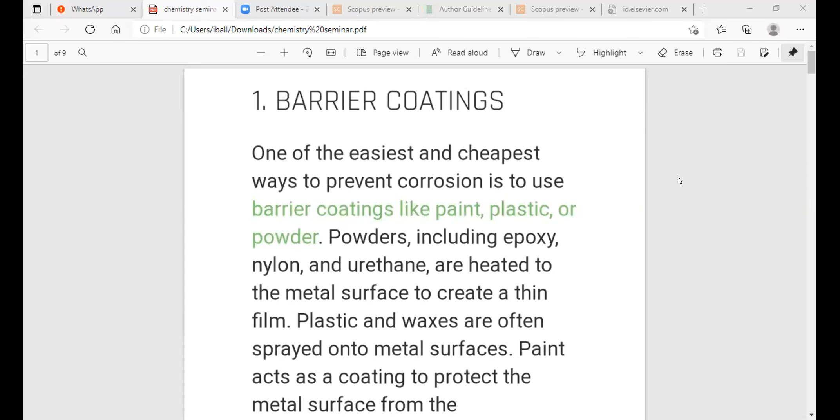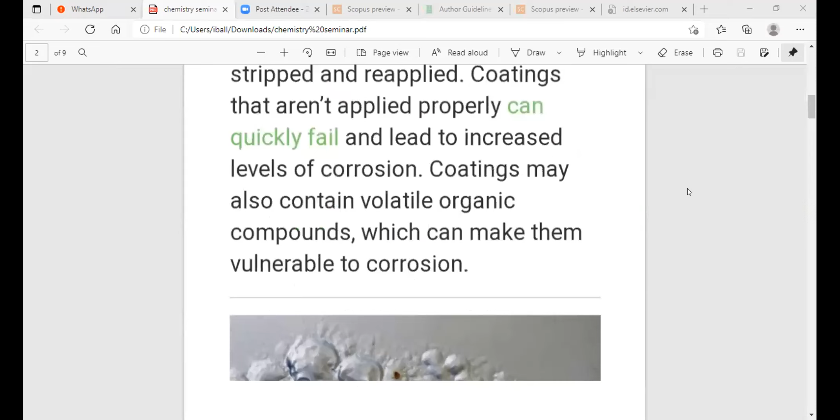paint, plastic, or powder. Powders including epoxy, nylon, and urethane are heated to the metal surface to create a thin film. Plastic and waxes are often sprayed onto metal surfaces. Paint acts as a coating to protect the metal surfaces from the electrochemical charge that comes from corrosive compounds.

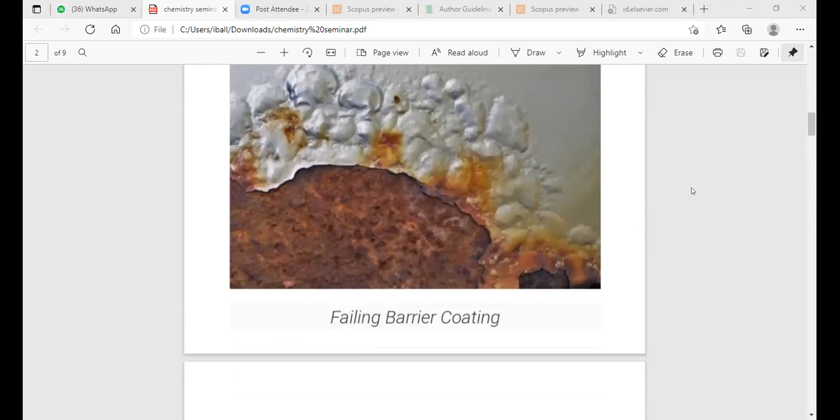Today's paint systems are actually a combination of different paint layers that serve different functions. The primer coat acts as an inhibitor, the intermediate coat adds to the paint's overall thickness, and the finish coat provides resistance to environmental factors.

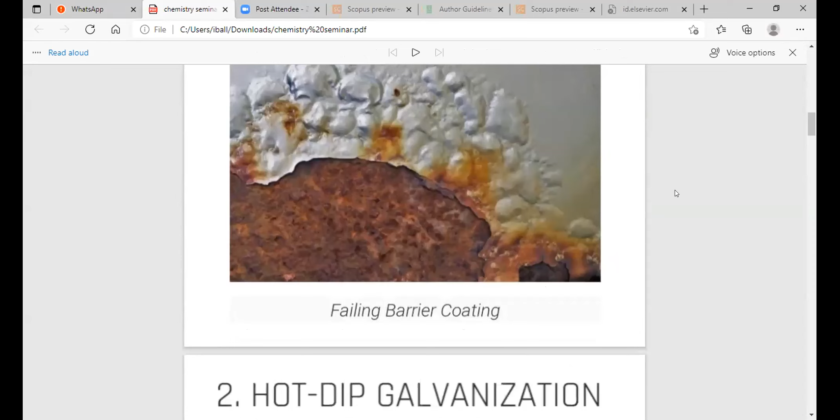Next, let us see the drawbacks of barrier coating. The biggest drawback with the coatings is that they often need to be stripped and reapplied. Coatings that aren't applied properly can quickly fail and lead to increased levels of corrosion. Coatings may also contain volatile organic compounds which can make them vulnerable to corrosion. This is an example picture of failing of barrier coating.

Now let's go through the second method, hot dip galvanization. This corrosion prevention method involves dipping steel into molten zinc. The iron in the steel reacts with the zinc to create a tightly bonded alloy coating which serves as protection. The process has been around for more than 250 years and has been used for corrosion protection of things like artistic sculptures and playground equipment.

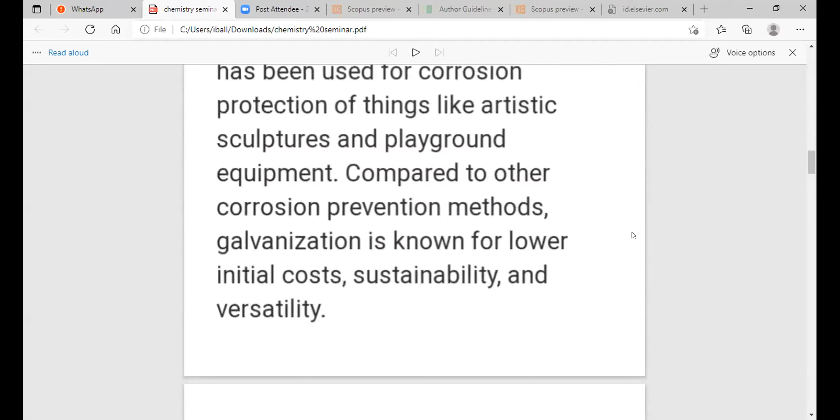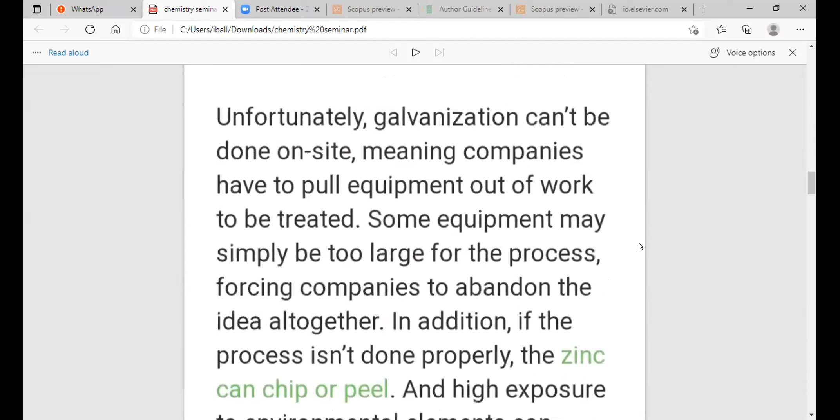Compared to other corrosion prevention methods, galvanization is known for lower initial cost, sustainability, and versatility. Next. Unfortunately, galvanization cannot be done on site, meaning companies have to pull equipment out of work to be treated. Some equipment may simply be too large for the process, forcing companies to abandon the idea altogether.

In addition, if the process isn't done properly, the zinc can chip or peel, and high exposure to environmental elements can speed up the process of zinc wear, leading to increased maintenance checkups. Lastly, the zinc fumes that release from the galvanizing process are toxic.

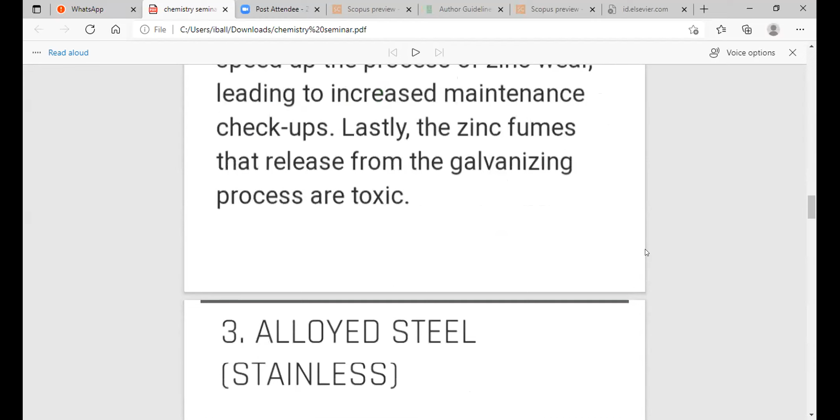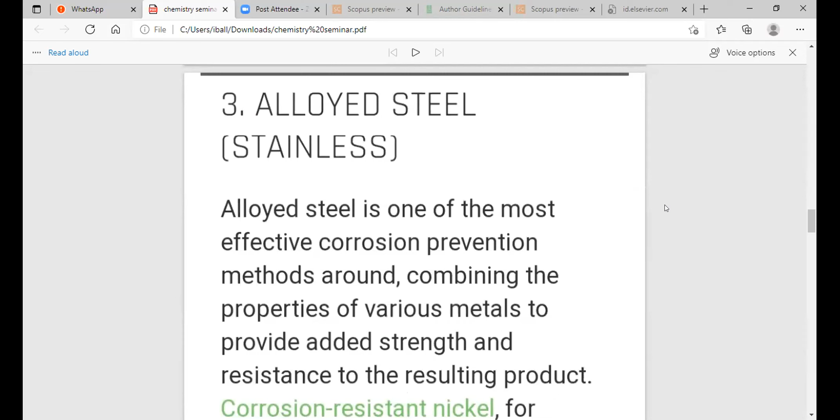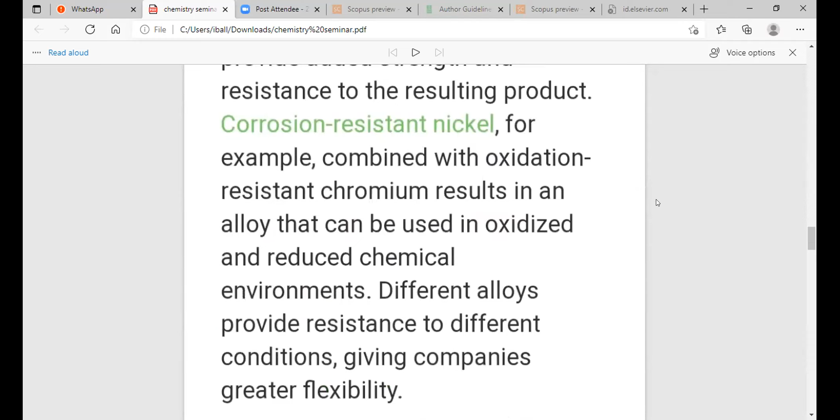Next, go to the third method, alloyed steel. Stainless and alloyed steel is one of the most effective corrosion prevention methods around, combining the properties of various metals to provide added strength and resistance to the resulting product. Corrosion resistant nickel, for example, combined with oxidation resistant chromium results in an alloy that can be used in oxidizing and reducing chemical environments. Different alloys provide resistance to different conditions, giving companies great flexibility.

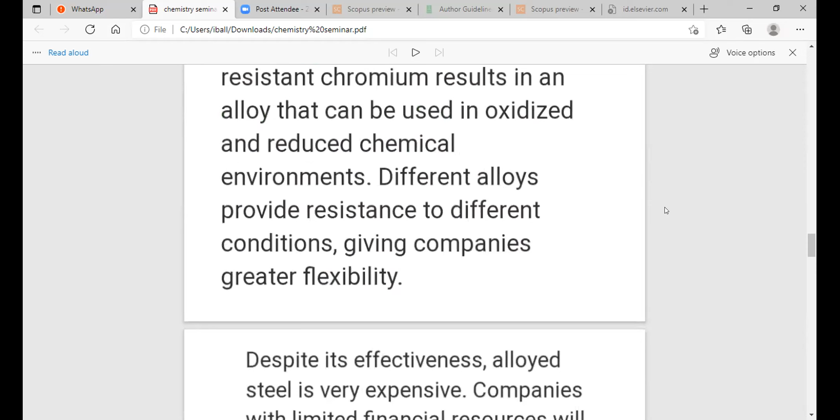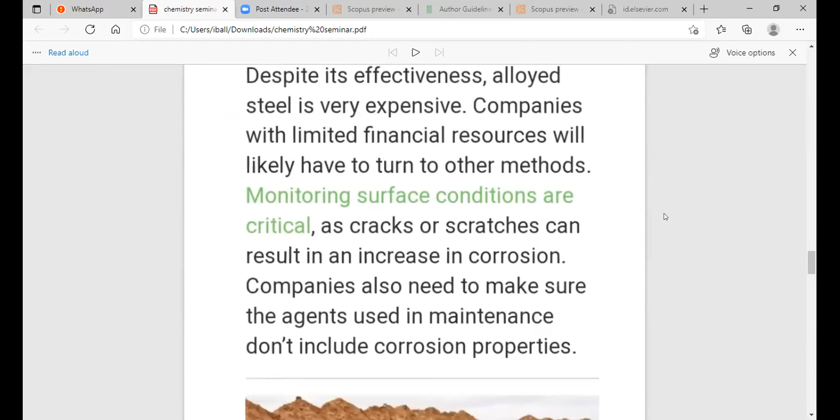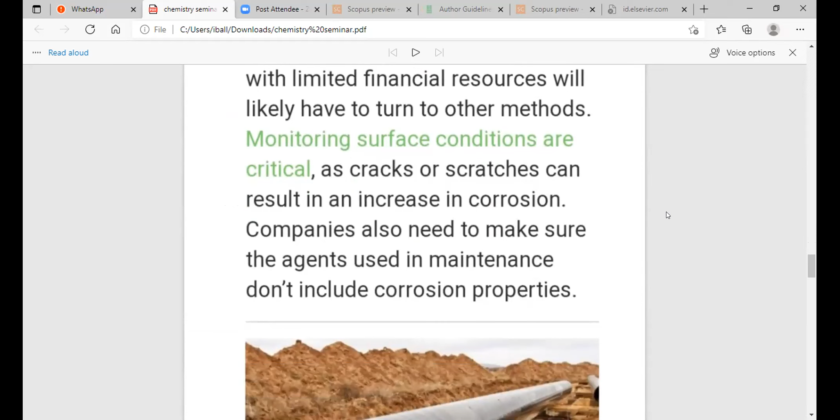Next, despite its effectiveness, alloyed steel is very expensive. Companies with limited financial resources will likely have to turn to other methods. Monitoring surface conditions is critical, as cracks or scratches can result in an increase in corrosion. Companies also need to make sure the agents used in maintenance don't include corrosive properties.

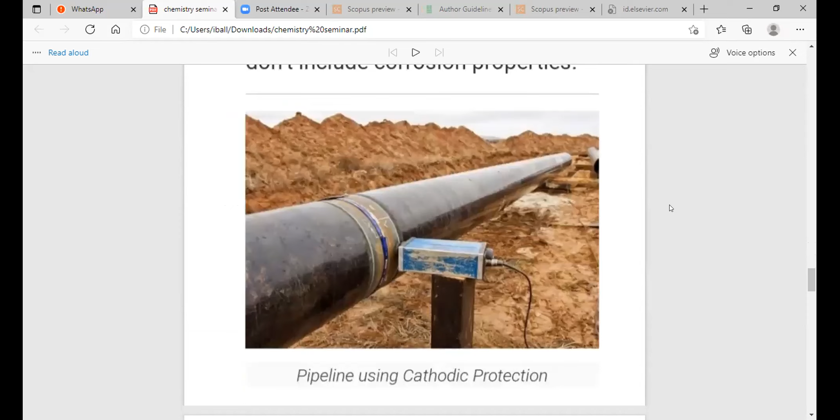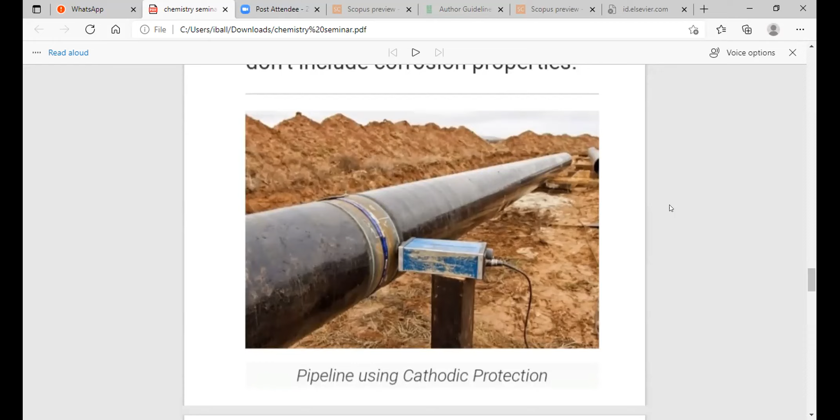Let us see the picture. In this picture we can see cathodic protection. Cathodic protection is the fourth method. In this picture we can see a pipeline using cathodic protection. Let us see the fourth method, cathodic protection.

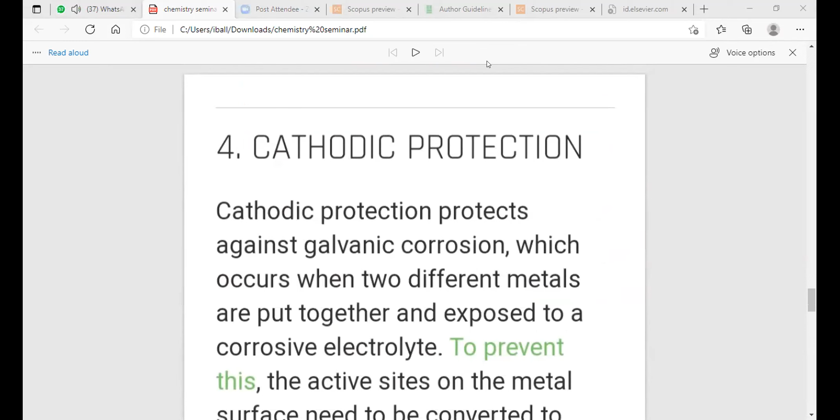Cathodic protection protects against galvanic corrosion, which occurs when two different metals are put together and exposed to a corrosive electrolyte. To prevent this, the active sites on the metal surface need to be converted to passive sites by providing electrons from another source, typically with galvanic anodes attached on or near the surface. Metals used for anodes include aluminum, magnesium, or zinc.

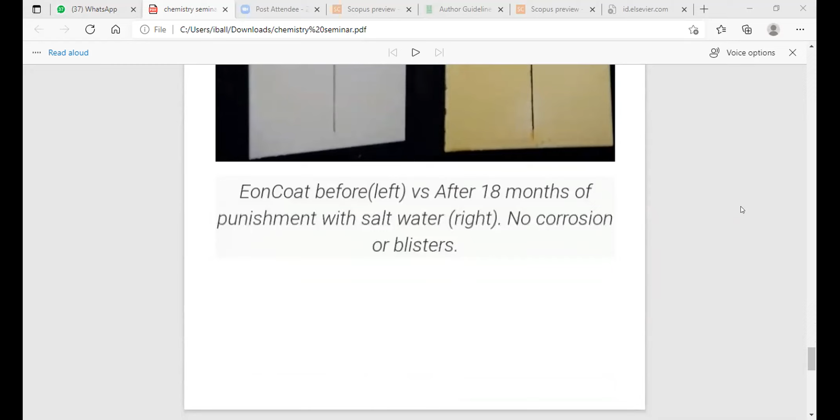This is an example picture of EonCoat before, left, versus after 18 months of punishment with salt water, right. There is no corrosion or blisters. Next, the fifth and last method of preventing corrosion, EonCoat. Choosing the right corrosion prevention for your equipment isn't easy.

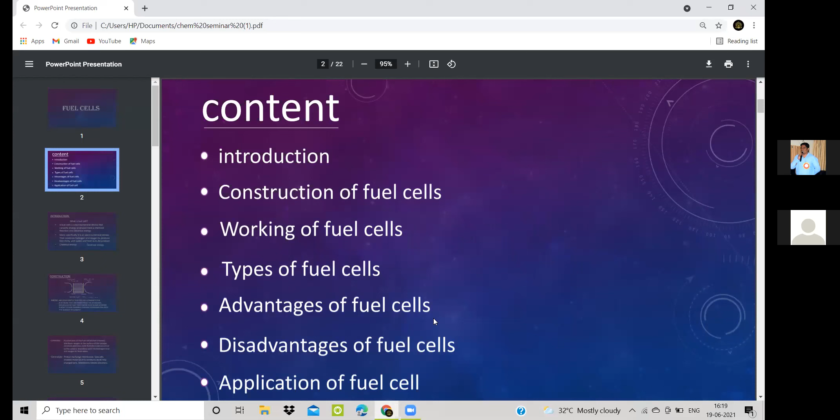Getting into introduction. What is a fuel cell? A fuel cell is an electrochemical device that converts energy produced from a chemical reaction into electrical energy. More specifically, it is an electrochemical device that combines hydrogen and oxygen to produce electricity, with water and heat as its byproduct. Here, chemical energy converts into electrical energy.

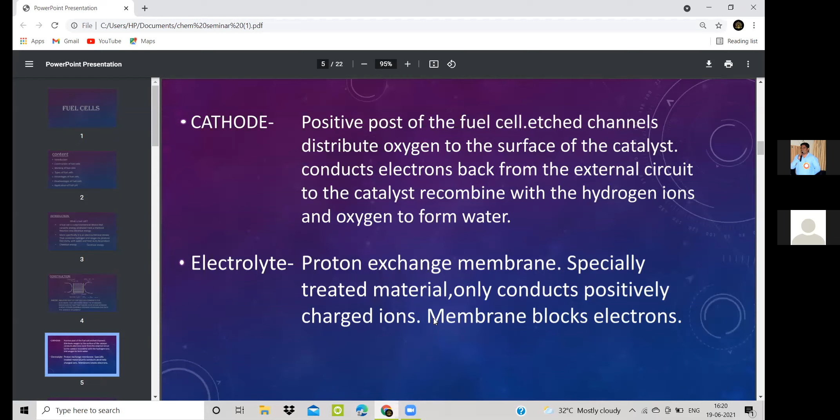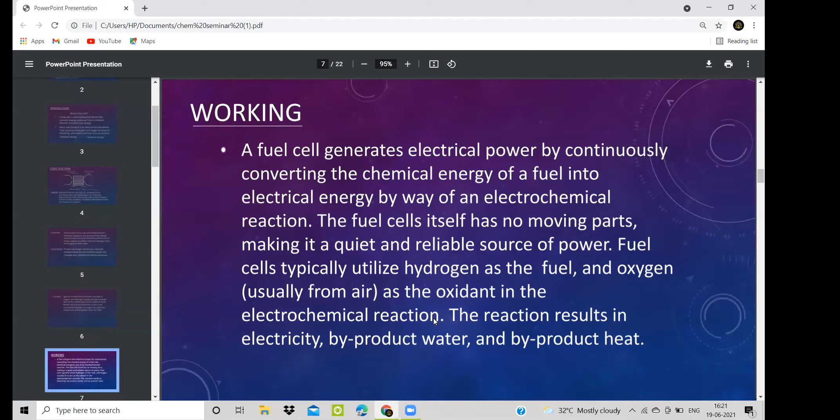Now, let us discuss the working. A fuel cell generates electrical power by continuously converting the chemical energy of the fuel into electrical energy by way of an electrochemical reaction. The fuel cell itself has no moving parts, making it a quiet and reliable source of power. Fuel cells typically utilize hydrogen as the fuel and oxygen as the oxidant in the electrochemical reaction. The reaction results in electricity, byproduct water and byproduct heat.

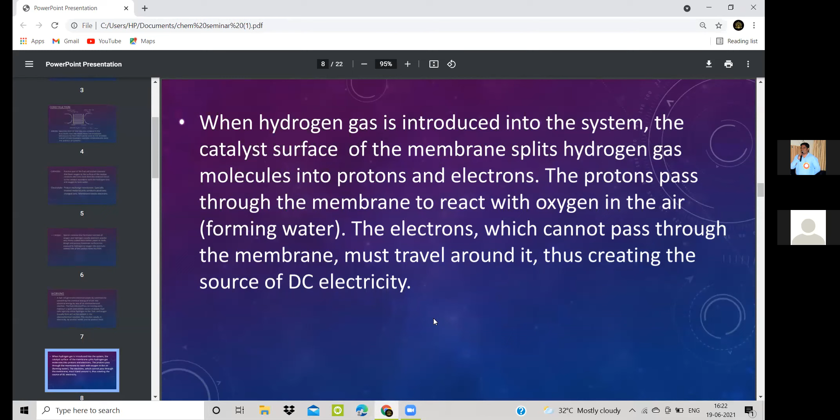When hydrogen gas is introduced into the system, the catalyst surface of the membrane splits hydrogen gas molecules into protons and electrons. The protons pass through the membrane to react with oxygen in the air. The electrons, which cannot pass through the membrane, must travel around it, thus creating the source of DC electricity. Now, handing over the topic to Bhavna.

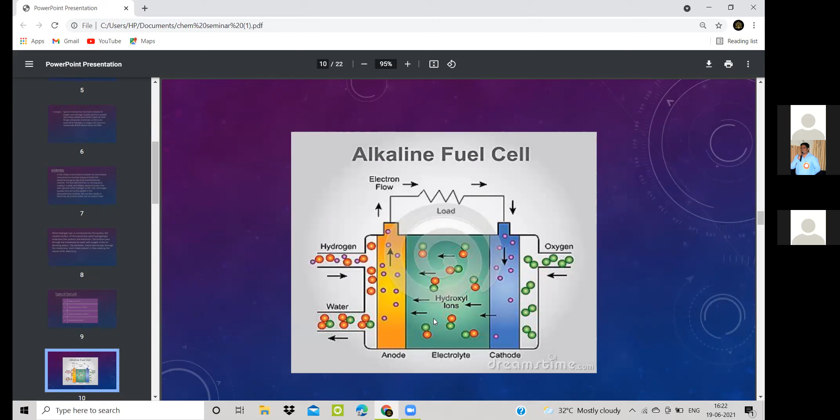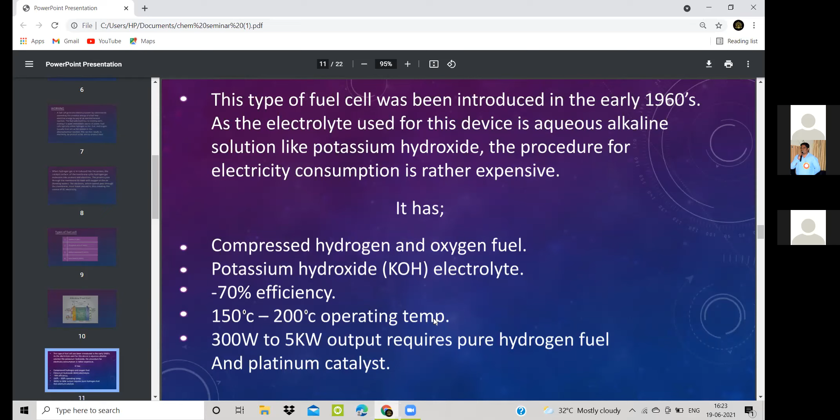Now we're going to discuss types of fuel cells. There are 4 types of fuel cells: alkaline fuel cell, phosphoric acid fuel cell, molten carbonate fuel cell, solid oxide fuel cell. Firstly, we're gonna discuss its mechanism. We can observe its mechanism in the given diagram. This type of fuel cell was introduced in the early 1960s. As the electrolyte used for these devices is an aqueous alkaline solution like potassium hydroxide, the procedure for electricity consumption is rather expensive. It has compressed hydrogen and oxygen fuel. It has potassium hydroxide electrolyte. It has up to 70% efficiency. It has 150 degrees Celsius to 200 degrees operating temperature. It has 300 watts to 5 kilowatts output, requires pure hydrogen fuel and platinum catalyst.

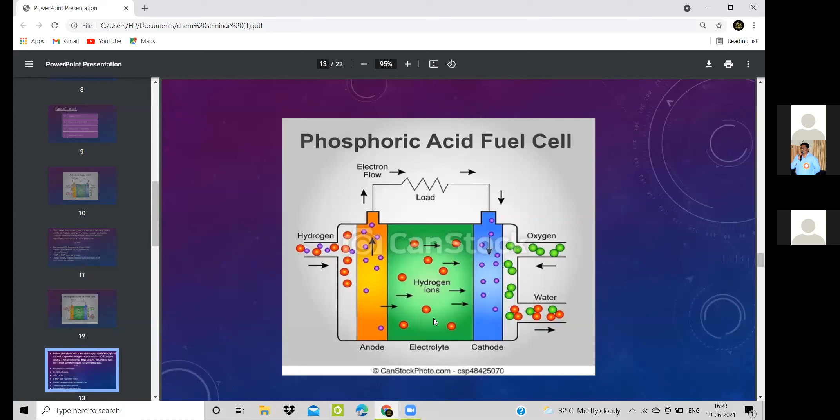Secondly, phosphoric acid fuel cell. Molten phosphoric acid is the electrolyte used in this type of fuel cell. It operates at high temperature up to 200 degrees Celsius. It has an efficiency of up to 55%. This type of fuel cell is most commonly used in commercial cars. It has phosphoric acid electrolyte. It has 40 to 80% efficiency. It has 150 degrees Celsius to 200 degrees temperature. And 11 megawatt units have been tested. Sulfur-free gasoline can also be used as a fuel. The electrolyte is very corrosive. The platinum catalyst is very expensive.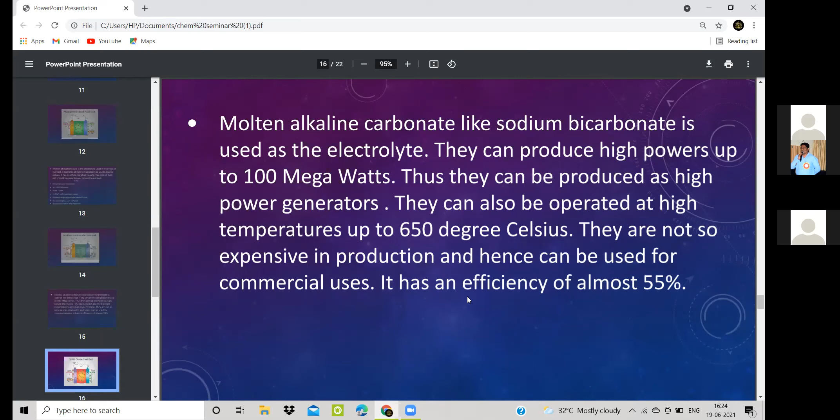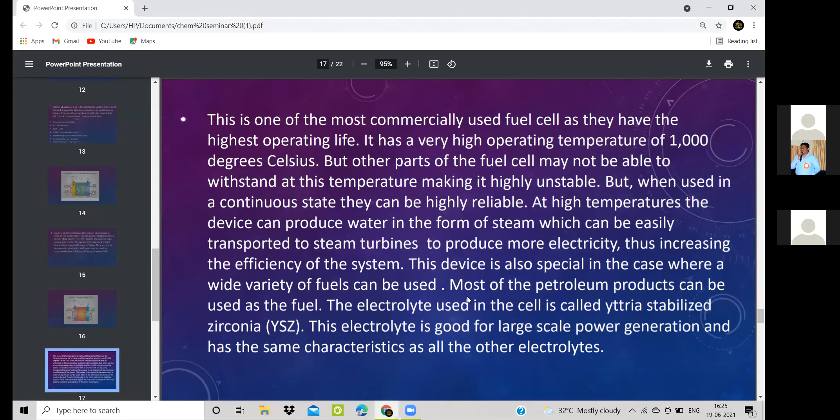This device is also special in that a wide variety of fuels can be used. Most petroleum products can be used as fuel. The electrolyte used in the cell is called yttria stabilized zirconia. This electrolyte is good for large-scale power generation and has the same characteristics as all the other electrolytes. As the device has very high operating temperature, there are some disadvantages as well. There may be unwanted reactions taking place inside the cell due to the high temperature. As a result of these reactions, carbon dust and graphite may build up on the anode, making it insufficient for reacting with the catalyst.

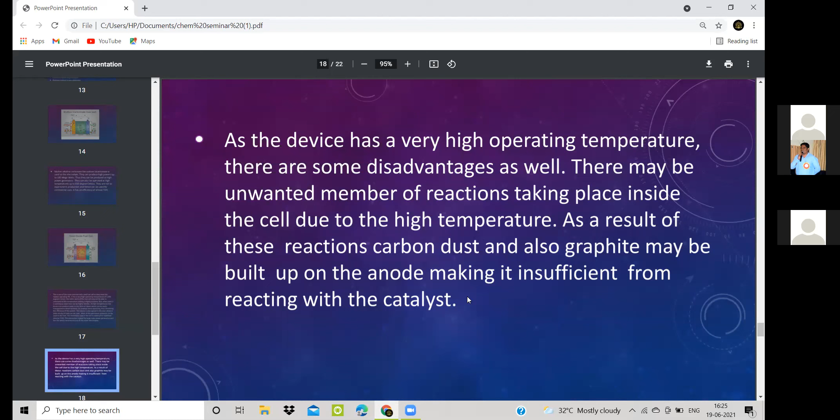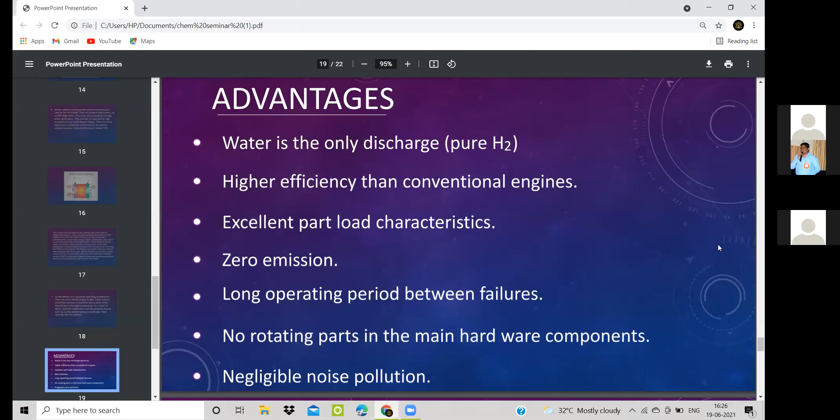And here are the advantages of fuel cells. Water is the only discharge with pure H2, higher efficiency than conventional engines, excellent part load characteristics, zero emission, long operating period between failures, no rotating parts in the main hardware components, negligible noise pollution. And the top disadvantages of fuel cells are CO2 discharged with methanol reform, little more efficient than alternatives, technology currently expensive, hydrogen often created using dirty energy, for example coal, and pure hydrogen is difficult to handle.